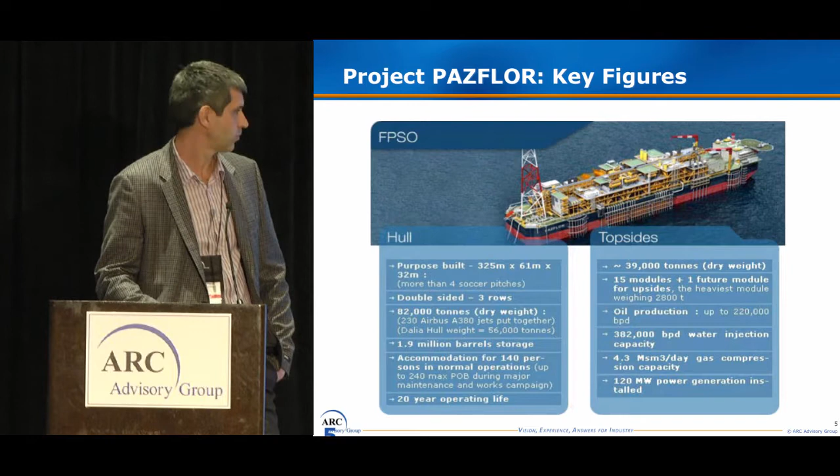So the challenge, why we developed an immersive training simulator. This FPSO was built in South Korea. So not all the operators were available or involved during the onshore commissioning, or during the end of the construction of the FPSO. We had a very short time between the anchoring of the FPSO in Angola and first oil, only 4 months. That means 2 rotations for an operator, so it's quite complicated to be familiar with the installation in 2 months of rotation.

We also had some POB constraints, even when we arrived in Angola during the hookup phase, because during the hookup you need to have your construction team finishing all the construction aspects. You have the offshore commissioning, so not all the operation personnel were allowed to come at the earliest phase of the hookup.

And even more, for the operators who were involved in Korea, it's not so easy to be familiar with the installation. We are in a commissioning phase. There is scaffolding everywhere. There are tarpaulins to protect equipment, for preservation. There are restricted areas when you are doing hydro testing or leak testing. So it's not so easy to find all the equipment, even during this period.

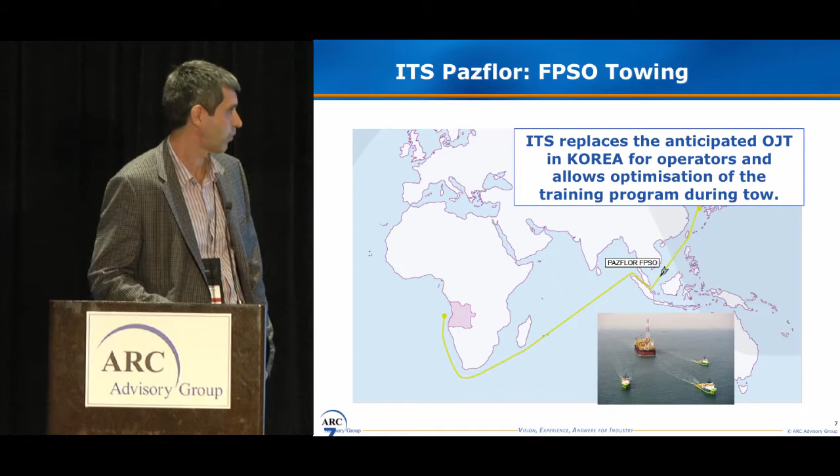So the first feedback of this immersive training simulator from the operators themselves. The feeling after the use of the ITS was very interesting, very useful. Only 8% find it a gadget. They use it quite rapidly.

Most of them are young operators, so they are trained to play with video games. So the translation is very easy. Here we are in a serious game, but they are able to use this simulator quite easily. We also found some verbatim and some comments, so they were very impressed and they had the feeling that the

tool was very helpful. My own REX on that: it was funny because I was on the FPSO when the first operators arrived on board, and it was very interesting to see how rapidly they got the information, and they were not completely lost when they arrived, due to the fact that they played some weeks on the immersive training simulator.

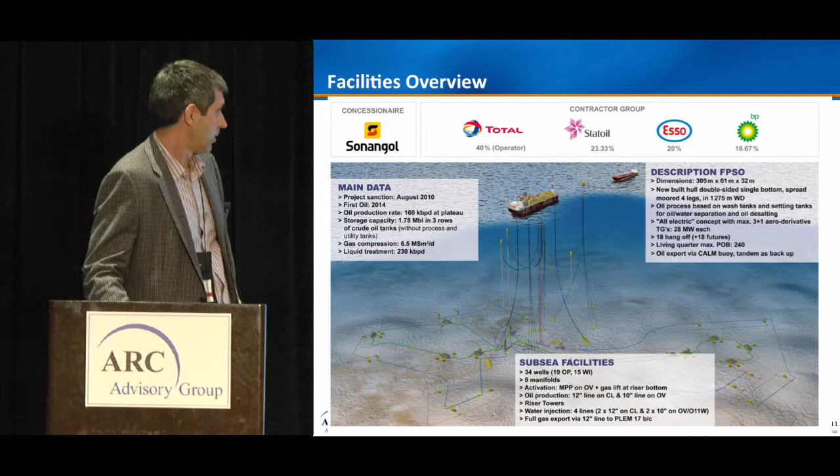So an overview of the CLOV project, quite the same. The same constraints as the Pazflor project. So the CLOV specific training. They have done the training in the Morro Bento center. They do the specific training, that means all the training on the process data, P&ID and so on. And they mix this training with the immersive training simulator. Like that, all the things they learn on P&ID, they go on the ITS and see where the equipment is, to get it more in mind.

In addition to the first ITS development, we also involved the maintenance personnel for CLOV. For Pazflor, it was only the production personnel. For CLOV, we involved the maintenance personnel in the ITS training as well, so they were also familiar with the installation to do their maintenance as soon as possible. The duration was 4 to 5 weeks on the ITS for operation personnel and 2 to 3 weeks for maintenance personnel.

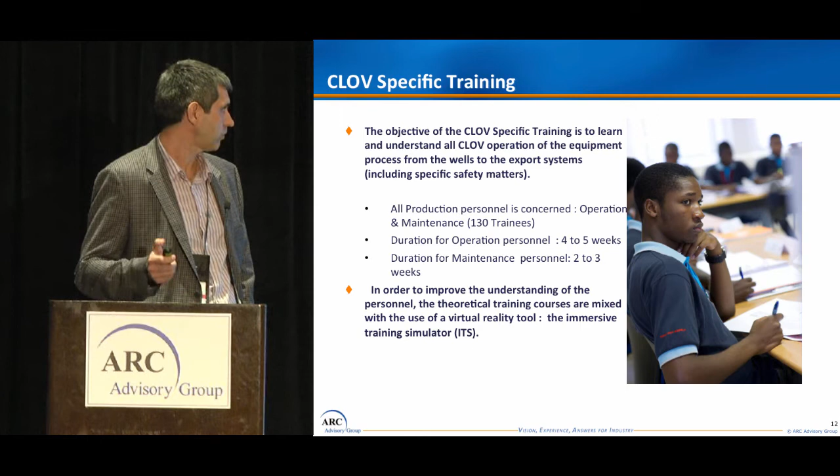This ITS was developed in two phases. The first phase was for localization of equipment, like Pazflor. We introduced as well the connection with our documentation management system, which is Prodom for Total. You can see the picture below. In blue, the avatar, so the operator, clicks on the equipment. And on the right side, you get the directory with all the procedures and data sheets available for this equipment, linked to the tag of the equipment.

On top of that, you get the key map view, to see where the avatar is located inside the FPSO, to have a better view of where the equipment is. On the top, another picture where you see on the left side a scenario on a production procedure. Everything is in red, but when the avatar accomplishes the task set in this procedure, it becomes green, and so on.

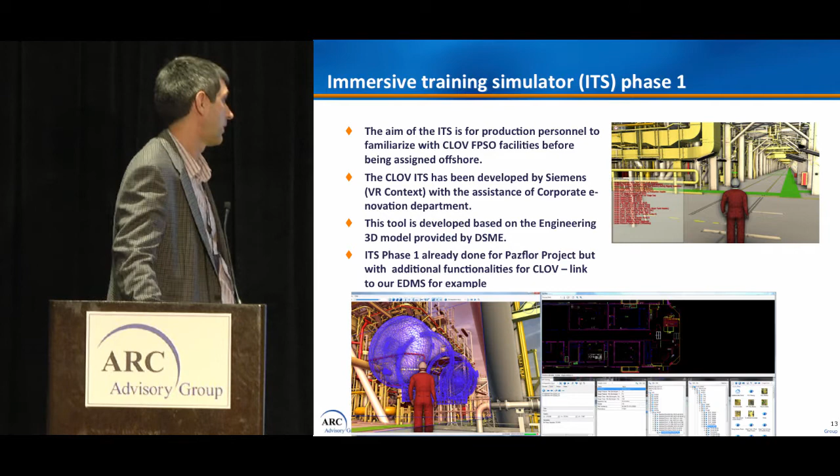Second phase, and the training is being done right now in Angola. This project is not yet started; first oil is planned for this year, and the training sessions are being done right now. We introduced some HSE scenarios to develop mustering and good reactions for the operators, for example. We have dynamic objects like fire. We can create a fire, smoke, gas and liquid leaks. We can introduce game objects, a man down, and so on, and some immersive effects as well.

The positive aspect of this development, the strong point, is the communication between trainees. The ITS can work in a network, so you can have several operators, several avatars, and they can communicate as in real life. For example, if they have a walkie-talkie with them, they can communicate, and this enhances the scenario philosophy.

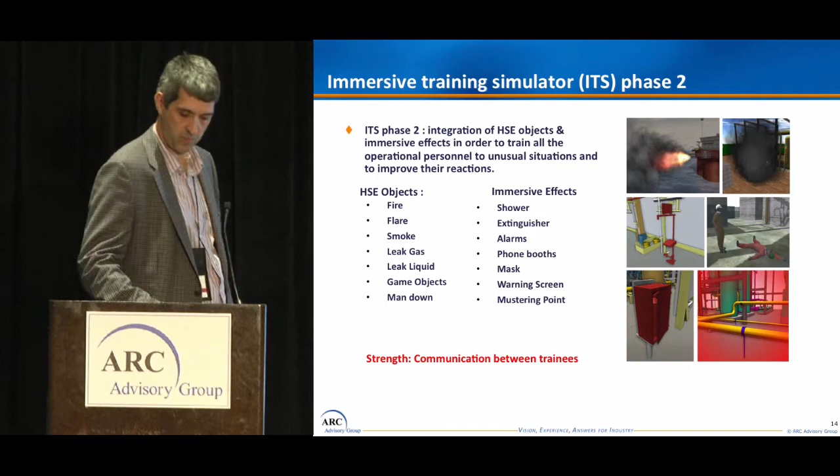Now I offer a free ticket to Angola and a free visit of CLOV.

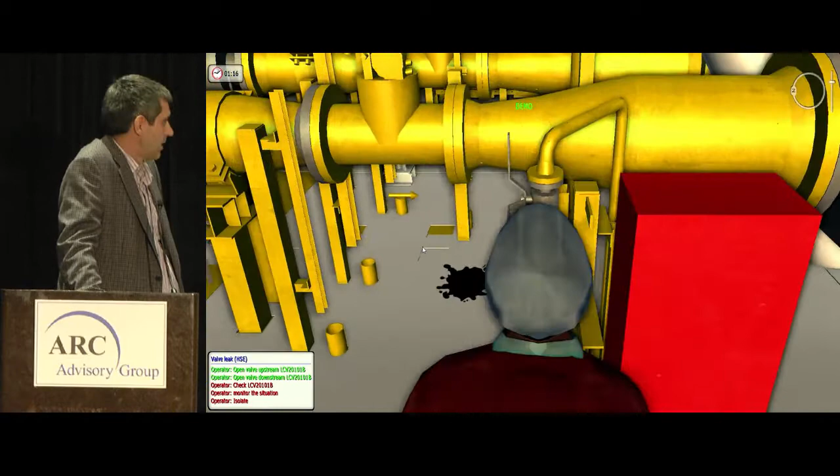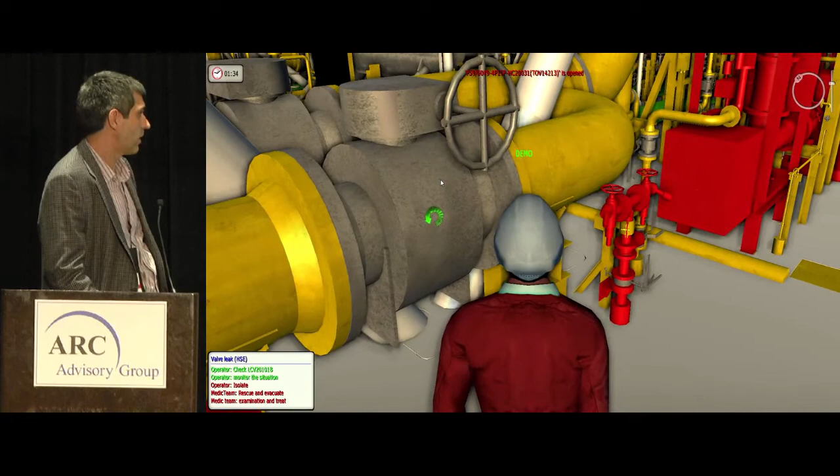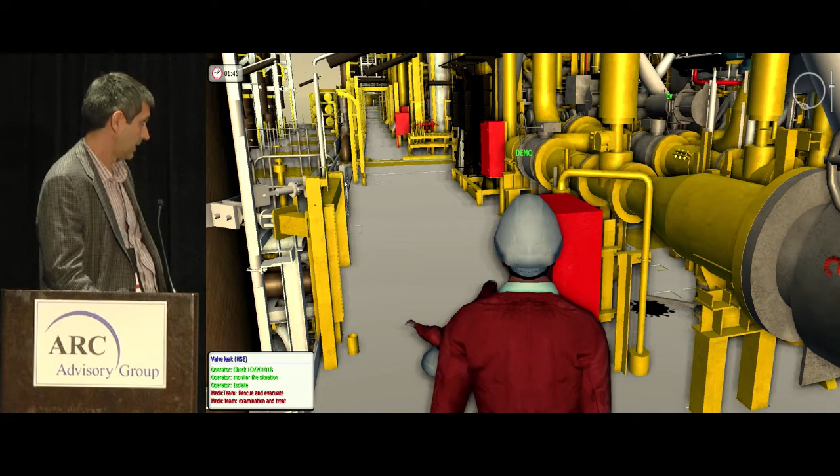I make a round, as if you were on board a chopper. This gives you the size of this FPSO, and also the compact topside modules, where sometimes it's difficult to find equipment. Now we're going to leave the flying mode, walk a little bit inside the installation, and go to the topside area.

See, you have the avatar, so the operator can go everywhere through the avatar, as in real life. He can climb stairs and so on. So here we are in the central way of the FPSO. On the left and right there are all the modules. So here the length is approximately 250 meters till the bow.

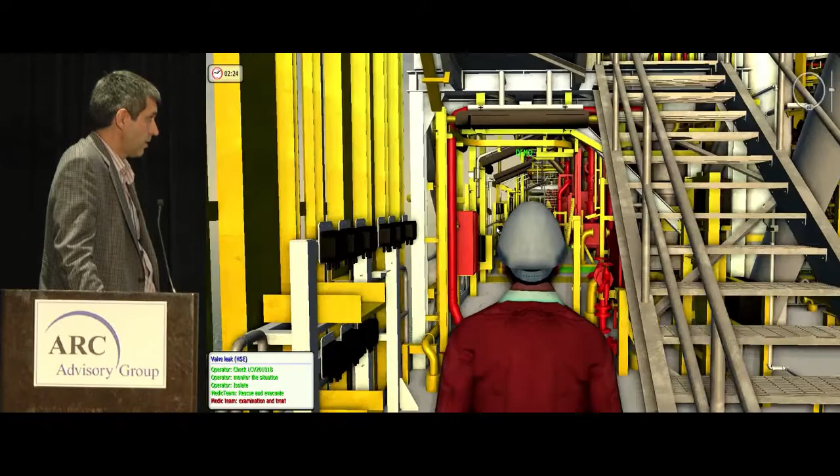So now it's going to the right. You see more details on equipment. You will see some pumps. If you want to go, yes. Here you have some methanol pumps. So everything is modelized with

this tool. Here we are in the living quarters, in the dining room. So it is not lunchtime, there is nothing there. But you can go inside the office, you can go inside the control room, inside the bedroom as well. Here, something very interesting as well. We are in the hull, we are inside the cargo tank. So something you don't have the opportunity to see often. So the operator can see all the internals and the volume of one cargo tank.

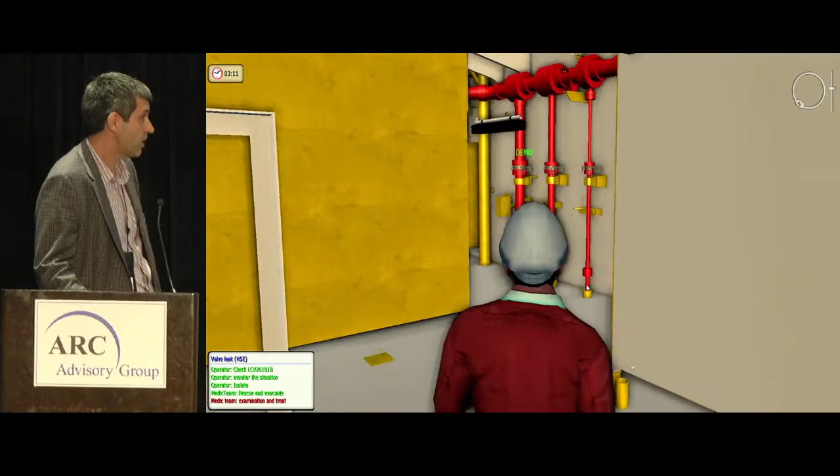See, this is to illustrate the links with our documentation management system called ProDOM. So when you click here, you get all the procedures available and also the data sheet with the main data below. So you can click on the procedure you want to see associated with the tag of the equipment, and then you have the procedure displayed on your ITS screen. Again, some pictures of the training center in Angola, where the operators were very happy to do this training.

And the last sequence is quite interesting. It will illustrate. You stop it? No. Go ahead. Oh, it's okay. It's moving slowly. To launch an immersive training simulator, we need to recover the 3D models of the EPC contractor. I don't know what's happening here.

Yeah. And this is what the FPSO looks like when we recover the models directly from the EPC contractor. You see some flying objects, some strange things, useful for the EPC contractor to design things. But here the FPSO looks more like, I don't know, equipment from Star Wars than an FPSO. So quite a big job to do after you recover the 3D model, to clean everything and to have the view of the FPSO you had before.

Okay, second video. This will be quick, just to illustrate what you can do as an HSE scenario. Here we start with an operational procedure. This is a lineup, so you will line up an equipment, open upstream and downstream valves. You see on the left side the procedure going on. And then, okay, he's lined up and he sees some drops of liquid, and suddenly there is some gas leak. Maybe there is some H2S in the gas, we don't know.

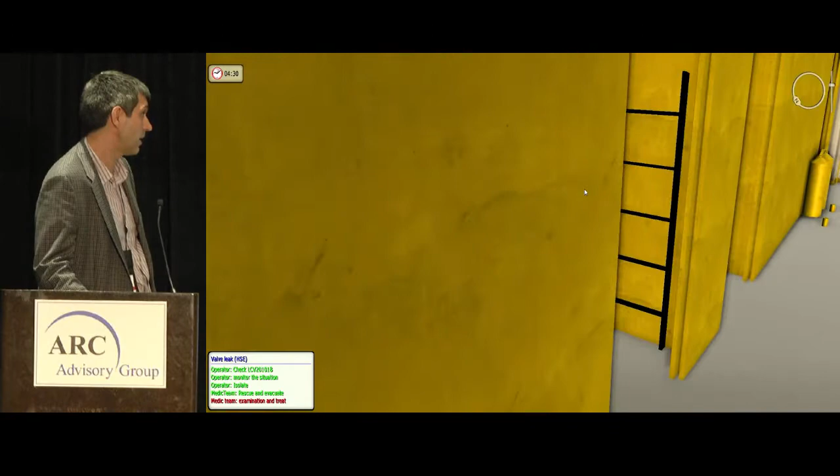So the operator wants to isolate what he put online. But you see his colleague is lying down, maybe he has smelled some H2S. So we have to call the rescue team and so on. The rescue team will arrive and will evacuate the personnel. So we have plenty of possibilities to create HSE scenarios. Of course, the input of operations personnel to describe the scenario we want is very important. And all the scenarios, especially for HSE, have to be validated by the HSE personnel.

Okay, we can stop there. It was a free ticket, so not so long, the visit. Okay. So it's nice for me.

So now I will conclude my presentation with the way forward. At this time, we have 2 ITS for Total upstream. We're going to launch, I think, a call for tender for 2 other ones. One will be in Nigeria, another FPSO. And another one will be a more classic platform in Norway, the Martin Linge project. And the way forward, of course, is to develop scenarios more and more linked to reality, if we want to use this immersive training simulator after first oil.

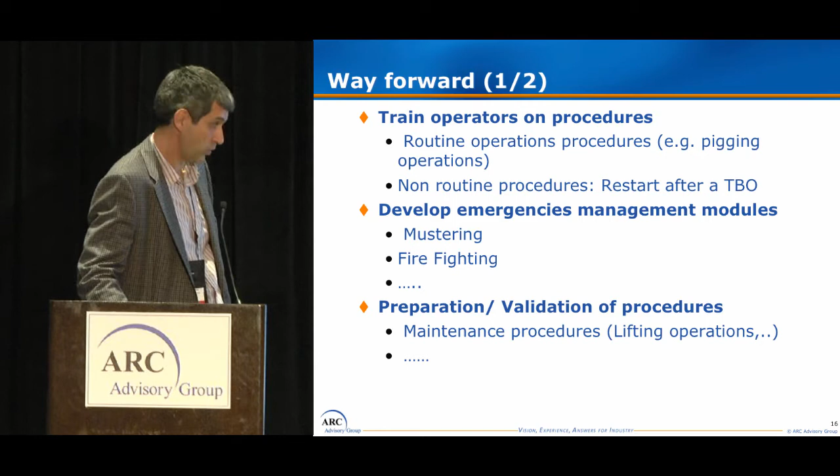And the last thing, I think, for us is the future, and we want to develop that for the other ITS we're going to have at Total, is a total virtual site. That means we want to couple the OTS and the ITS to increase the scenario possibilities. For example, if we want to play a black start procedure, that means after a total blackout, you need to restart your installation, and it's very critical, especially for deepwater developments, where you have what we call a no-touch time of 4 hours. After these 4 hours, if you do not restart your recirculation, you can lose your loop. You can also lose big production.

So, to train the personnel: we are lucky that total blackout is not so frequent, but when it happens, we want the operators very well trained and rapidly at their positions, taking the actions they have to take in order to minimize the startup time. And that concludes my presentation. Thank you very much.